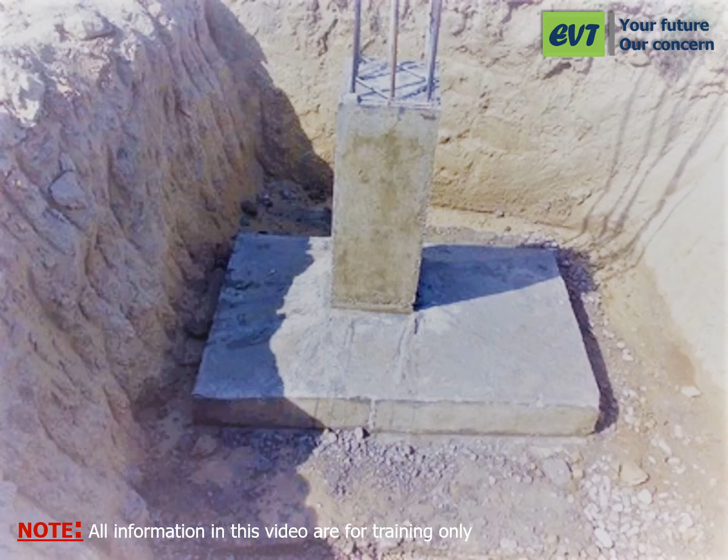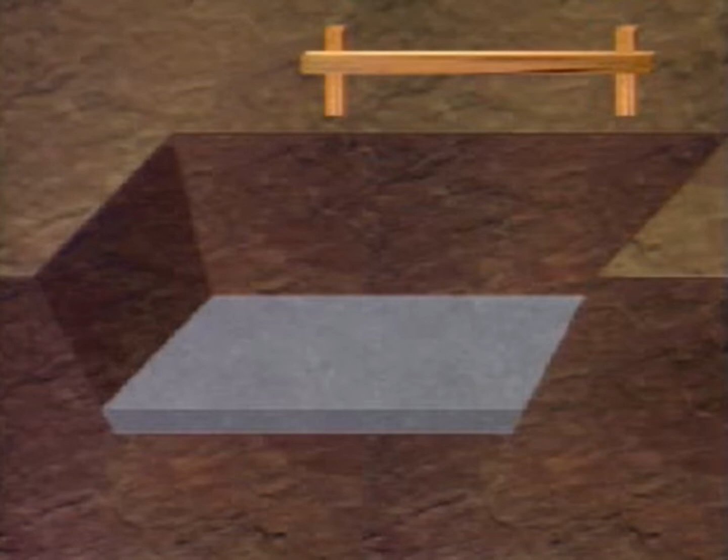Isolated foundation footing. An isolated foundation footing is the excavation, lean concrete, a concrete block with steel reinforcement. There are two techniques for making a footing.

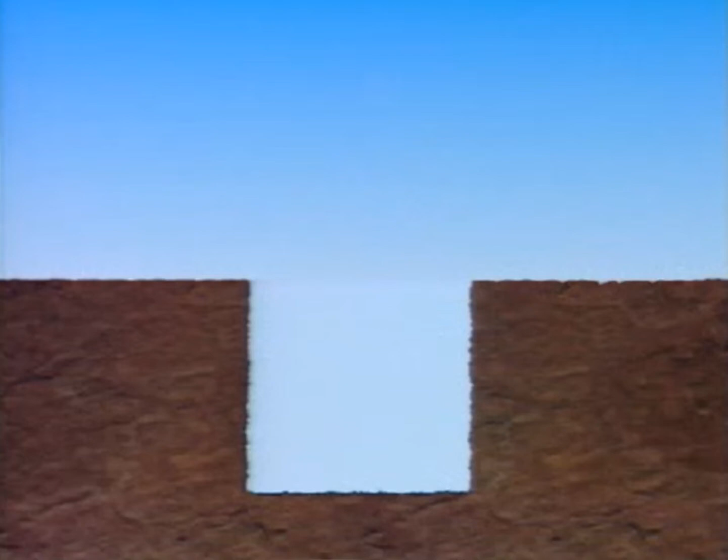Here is a natural ground sectional view. The footing concreted directly in full excavation. Here is a footing formwork.

Today we are going to make an isolated footing. The dimensions of the footing are 70 cm long, 60 cm wide, and 30 cm high. The depth of the footing is 65 cm. The excavation will have an extra width of 50 cm on the sides to facilitate the installation of the formwork.

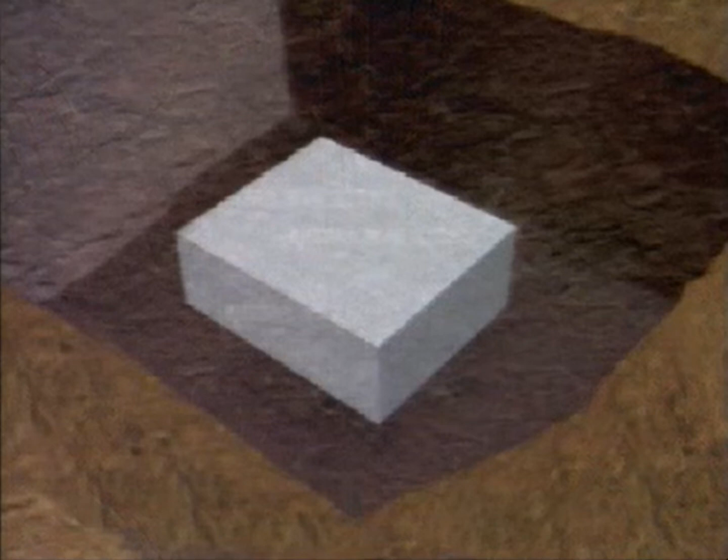At first, the worker will draw on the ground axis, which will allow him to set up the excavation of 170 cm in length. We have 70 cm of footing plus 50 cm on each side. The width of the excavation is 160 cm. We have 60 cm of the footing plus 50 cm on each side with 65 cm of depth.

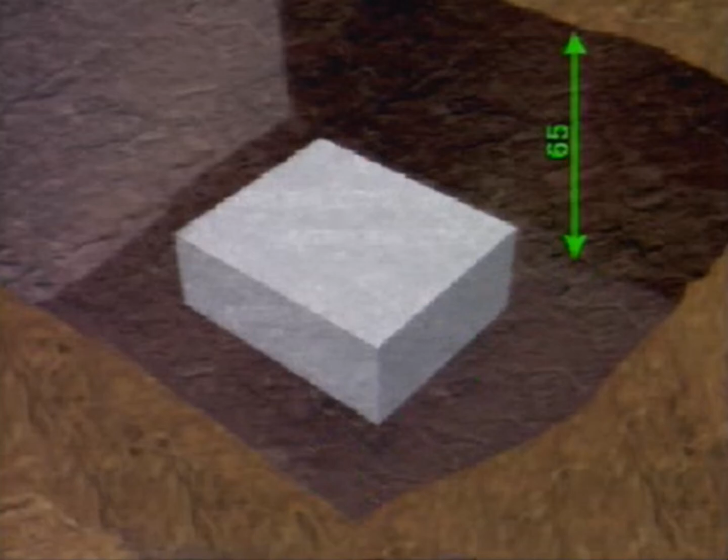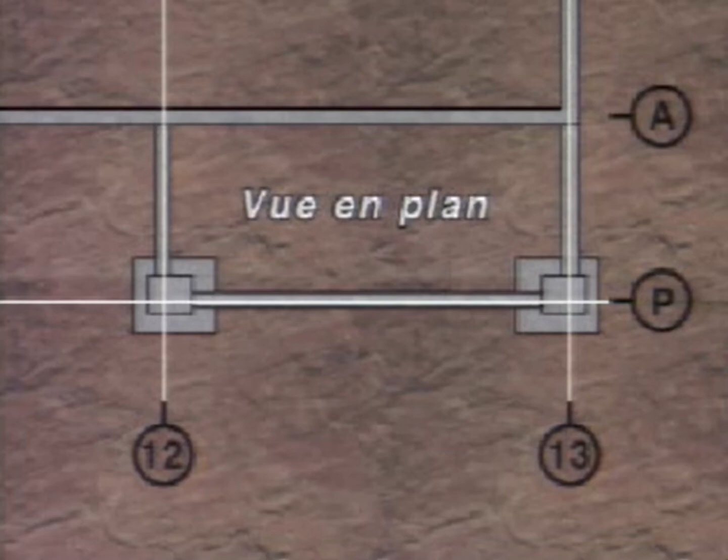Here are two isolated footings. The footings are positioned at the intersection of two axes. The long line is attached to the chair marked P. Here the footings are placed at the intersection of the axes. We are going to work the footing S10, which is at the intersection of axes 13 and P.

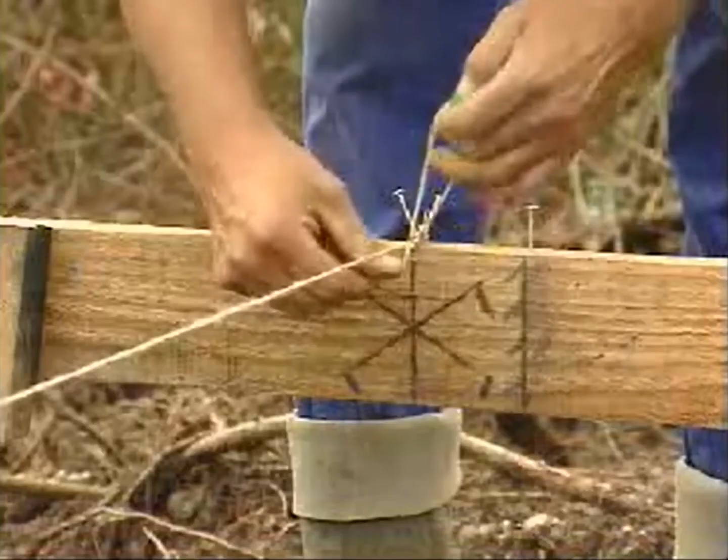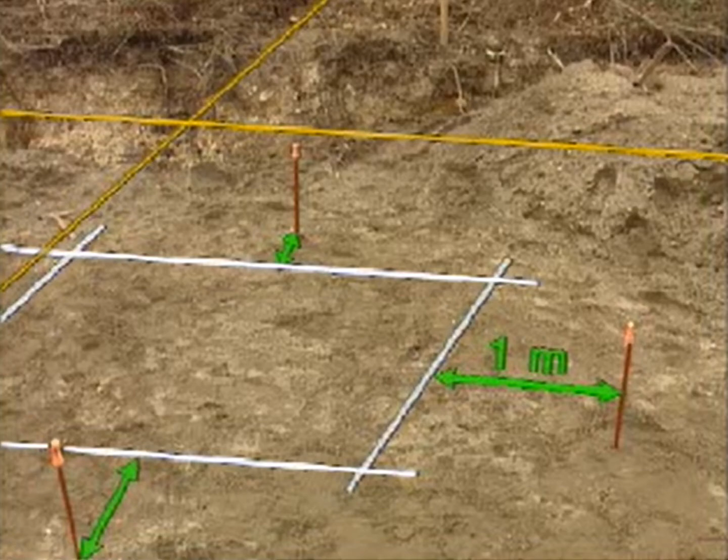Here the worker takes each intersecting line in reference to the footing to be constructed. With the vertical plane, he reports the axes to the ground and marks them with the steel bars. The steel bars are protected by plastic caps. The worker is tracing the footing excavation. The steel bars are fixed 1 meter from the footing excavation line so as not to interfere with the earthwork.

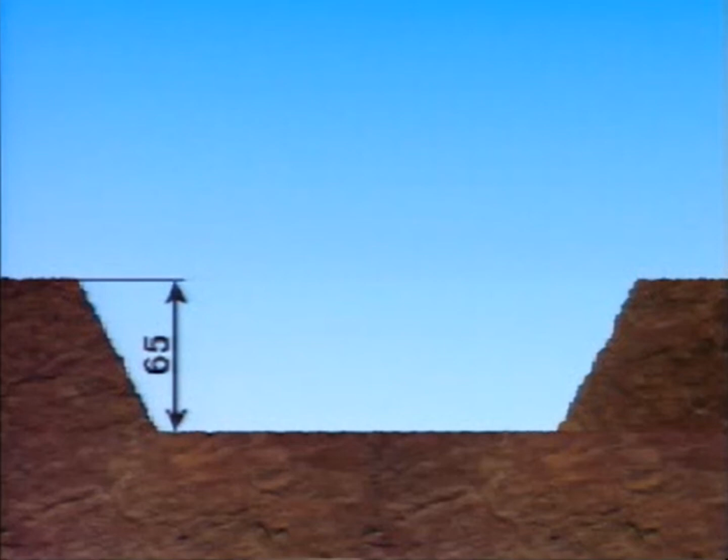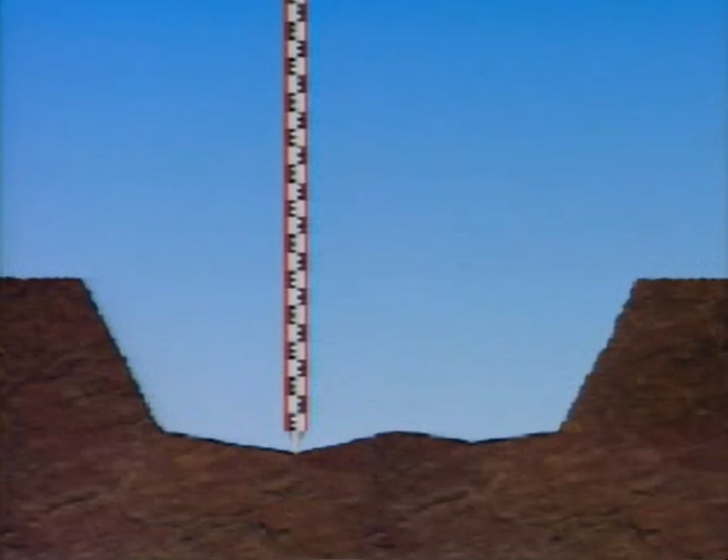At this stage, the foreman informs the worker about the depth of the excavation. The depth of the excavation is 65. The excavator excavates the footing earthwork. The worker continually controls the dimensions, in particular the depth of the footing excavation. The worker positions the rod at the lowest point. After that, the foreman in charge controls the stage of the footing excavation bottom.

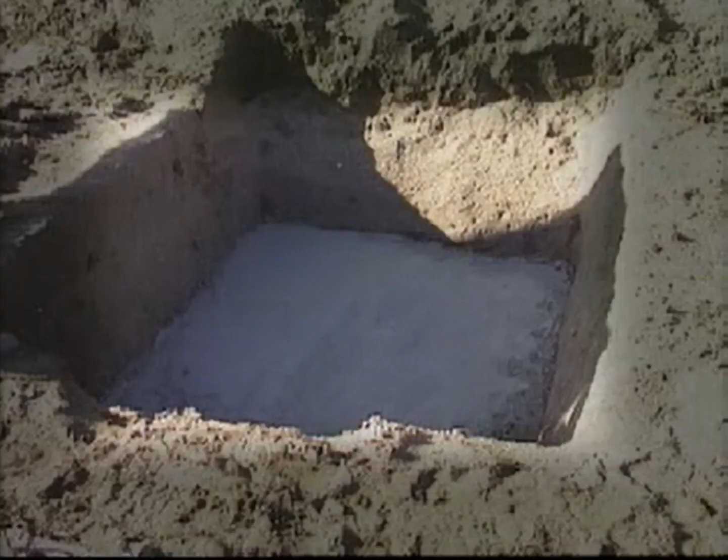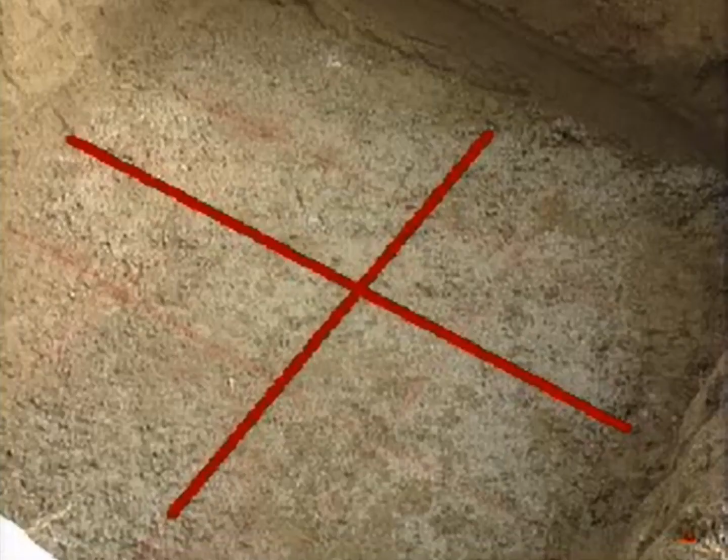After that, when the lean concrete has set, the worker can lay out the footing. The lean concrete allows to trace the footing and install the reinforcement. Here the red line determines the axes and the blue line signifies the edges of the footing. Here at the end of the tracing, we have the following marks on the lean concrete. We have the rectangle of the footings and the marks of the block of the formwork.

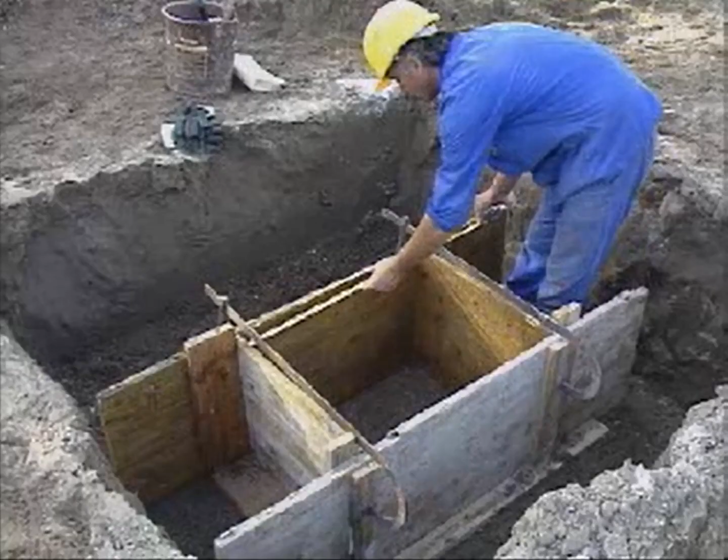After that, the worker installs the formwork for this footing and needs to control the squareness and closures of panels. After that, the worker installs the reinforcement in the footing formwork. The steel reinforcement is held in place. Now the formwork is finished and ready to receive the concrete.

After that, when they receive concrete, the concrete is installed in the formwork up to the level mark. The worker adjusts the upper part of the concrete. When the concrete is finished, the next day the worker dismantles the formwork of the footing.